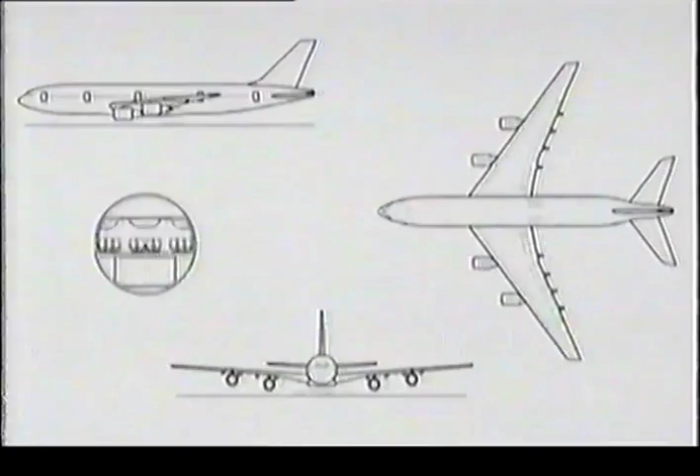Starting from scratch is the most expensive option, but it's what Airbus decided to do. The plane went through dozens of iterations as designers and engineers worked for over 10 years. The size was driven by the airlines, struggling to increase passenger numbers in the face of increasing air traffic congestion.

The airlines told us, don't be shy, don't hesitate. Of course it has to be big. It has to be bigger than anything that is flying. So don't be shy, don't hesitate. Make it really big.

The resulting design was a plane with 49% more space than a 747, capable of carrying over 850 passengers. Using advanced technology, it would be highly efficient and, crucially like the Jumbo, have no competitors.

If they could get it right, the A380 could fulfill its ultimate goal, to make huge amounts of money. Is this about money? Of course it is. Think about the revenue potential. Each airplane sells in today's dollars at a catalog price of about $300 million.

Over 20 years, our global market forecast is about 1,600 aircraft. Assuming we got that entire market, we won't, but assuming we did, with a monopoly position, you'll get pretty close to it. That would be, over the next 20 years, 480 billion US dollars. Suppose you only get half of it, 240 billion US dollars at catalog price. Now that is an awful lot of money.

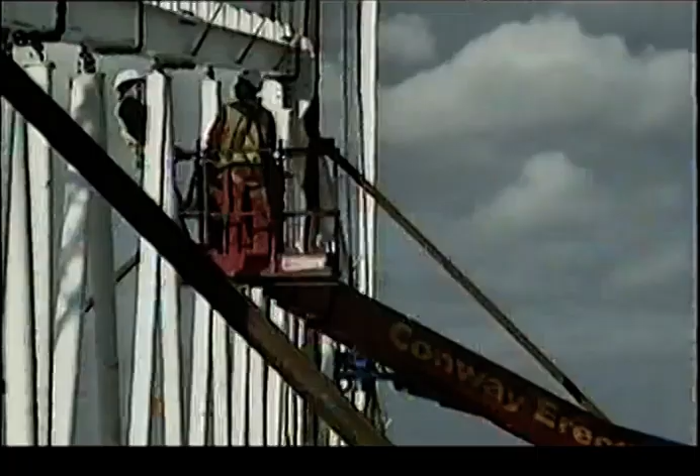December of the year 2000, and now that Airbus have a basic design for their huge new plane, they can start building it, or rather the buildings that will build it. The aircraft is so big that new factories are needed for almost every major component. On top of that, Airbus always share the work between its 4 founding countries, so a major international construction project is required.

The A380 will be built from a giant kit of parts made mainly in Spain, France, the UK and Germany. And each country has had to invest heavily in new facilities. Other parts will come from more than a dozen other countries, so the plane is truly a global effort.

It's big, it's really big. You name it and people are working on it, so at the end of the day it's almost impossible to count the number of people working on this project.

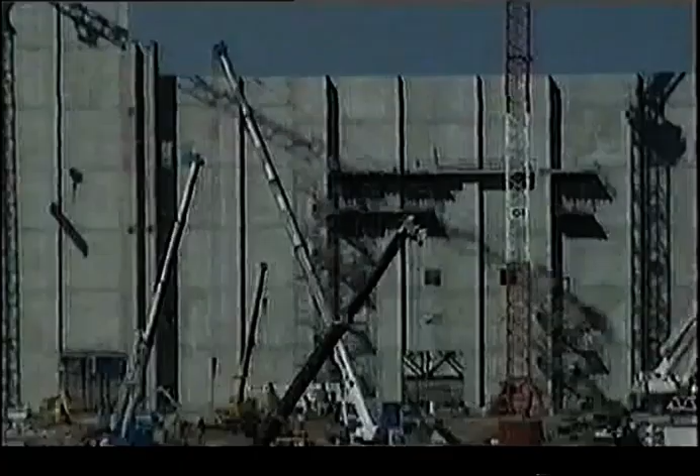The biggest single development is near Airbus headquarters in Toulouse. The final assembly line is where the various components of the plane will be joined together.

Work began in 2001 on a complex that would cost £240 million on its own. A third of a mile long, it covers 24 acres, big enough to hold 8 planes at once. The huge cost of this programme means Airbus have to sell 250 planes just to break even.

And to help the drive for early sales is a nearby showroom. Inside is a full-size demonstrator of the new machine. Getting customers to spend a lot of money on a plane that has yet to fly is quite a challenge.

But Chief Commercial Officer John Leahy is full of confidence. Why would you want to spend $265 million for something like this? Because it'll do something no other airplane in the world can do, and that's bring people 8,000 nautical miles in a level of comfort that's never been provided before.

Although this interior is just a fantasy, an exercise in design possibilities, it is still a salesman's dream. How often do you see this? Well, yes, it's an extra large loo, but it's also a shower. And this is something that you don't see in an airplane, and maybe you should.

The mock-up is designed to whet the appetite of customers such as Sir Richard Branson, head of Virgin Atlantic. He's agreed to buy 6 planes, based on the promise that the A380 will set new standards for performance and efficiency.

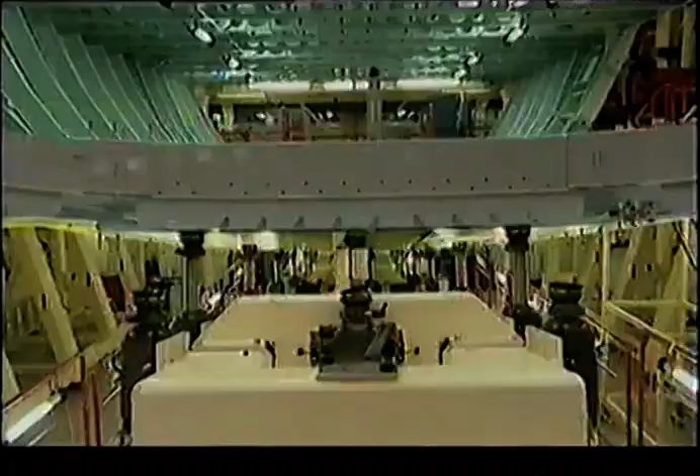The first piece of metal is cut in January 2002. And shortly afterwards, huge components are being produced in the brand new factories all over Europe. In Germany, large sections of the fuselage rapidly take shape, put together using high-tech materials and thousands of rivets. In France, the carbon fibre centre wing box, the structural heart of the aircraft, comes together.

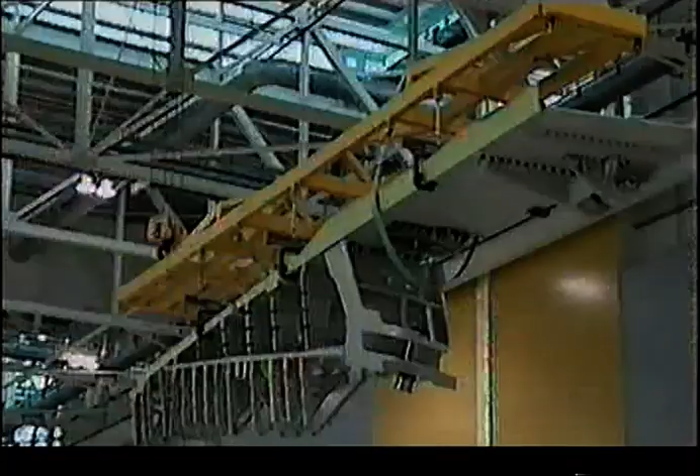In the UK, in Broughton, North Wales, the wings themselves are assembled. Built up from hundreds of components, each one is constructed standing on its rear edge. It looks more like the hull of a ship than part of a plane.

By November 2003, the first wing is ready to be hoisted out of its supporting jig, and engineer Simon Shingler and his team will get their first sight of the giant part.

The whole idea of having you all here is to make sure that you're all concentrating on your one specific station, right? That's how we're going to ensure we take this wing out without anyone hurting themselves or without the components getting damaged. When we're lifting this wing out, make sure all the mobile phones are turned off.

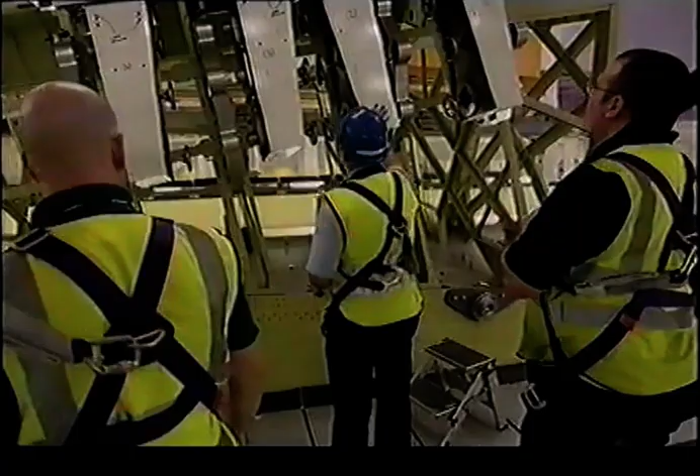Despite the laughter, this is a serious business. The wing weighs over 30 tons, and to damage it now would be disastrous. Everybody gets very excited, and it's easy to leave one of the attachments in place or part of the tooling, because there are so many attachments around the periphery of the wing. If that happens, it causes damage when it's being lifted.

Alan Ferguson is in charge of the first stage, attaching the hoist to the solid titanium lifting points. What we're doing is making sure we get the crane correctly aligned with the lifting attachment, so when we make the initial lift, we don't get any sway on the wing. So it's critical, yeah.

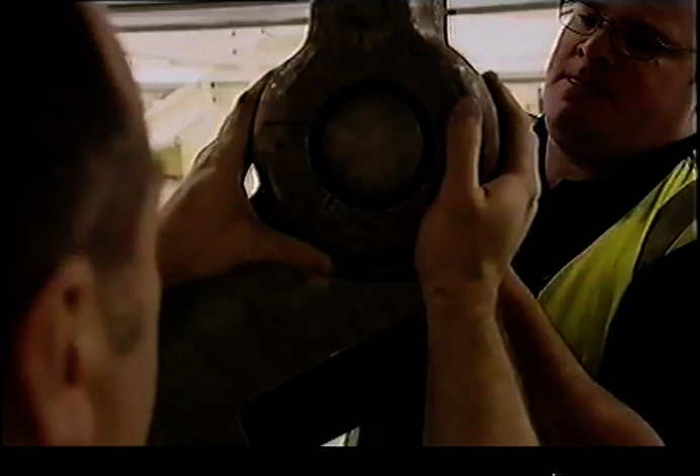Right, we're ready to go. We want everyone in place now, and then we're going for it completely. Right, gather round please, gents. The operations team and the crane driver are going to take some weight. We're going to release the front spar, and then we're going to remove the wing. Try to stay calm, don't panic. We'll do everything nice and slowly, there's no rush now, but once we start, we're not stopping. Thanks very much. Okay. Right.

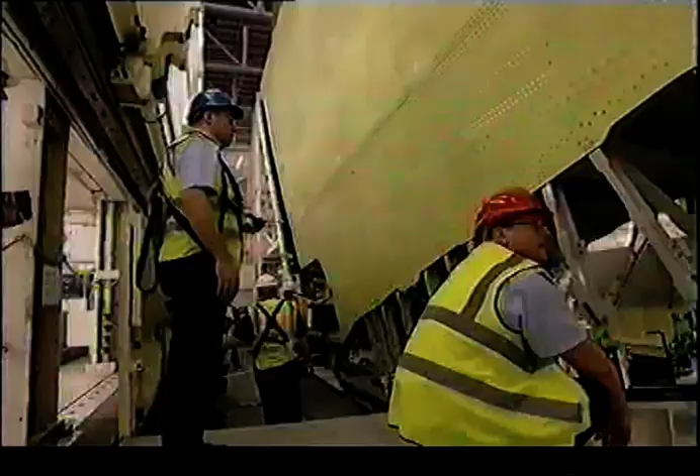Steady now. Okay. All right, you're clear, take it off. Right, get that spar support out, please. Is it down? With one small movement, the wing is free. Clear, I think the wingtip's clear.

Now it can be lifted out and into the next hall. Don't forget the outboard end. Okay now.

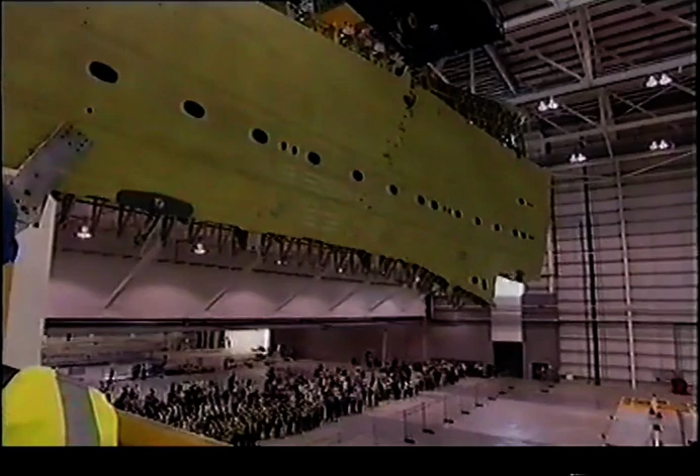The wing may look big now, but once the rest of the parts are fitted, it will grow by half as much again.

The true size of the A380 is starting to show. I think the whole world's going to look on in awe the day it flies, and I think the Boeing Aircraft Company have got something to be very wary of.

But even while the major components are being built, detailed design of the interior and many other parts is far from finished. Charles Champion and his team of senior executives meet once a fortnight in Toulouse to try and keep the project on course.

With so much happening at once, there is a real danger of becoming overloaded. Can we start? It's a question of time management, because not only time management at work, but also time management with your personal life, and you can burn out. Basically, if you're not careful, you just can burn out, and at the end of the day, you're out.

Andreas Fähring has been brought in to replace the previous head of interior engineering. For him, it's particularly tough, because he's taking over a department that is already 3 months behind schedule and over budget. Team and myself, we are under enormous pressure, because we have to keep the timeline, and we are late. We have to keep the budget line, and we have major difficulties to do so.

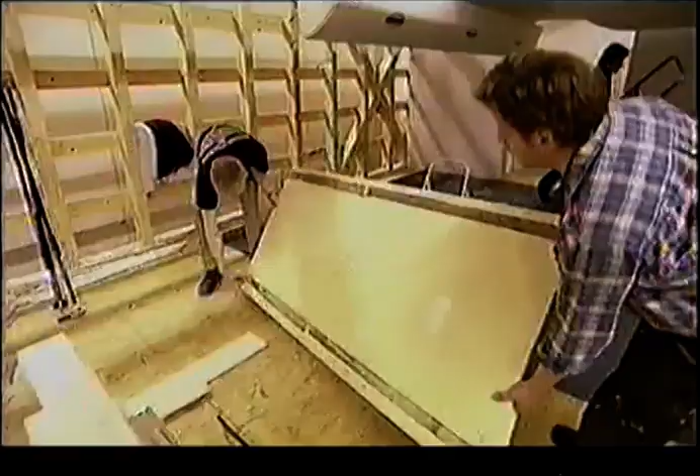Each airline wants a customized interior, so Andreas has to engineer dozens of unique features to keep them all happy. You can change the lighting area over here. You can have green light, you can have blue light.

Then there's the task of turning the sales department's dreams in the mock-up in Toulouse of showers and the like into reality. We will have showers on our aircraft, but not in the way they're displayed at the moment in Toulouse, because those are designers, not engineers building the stuff.

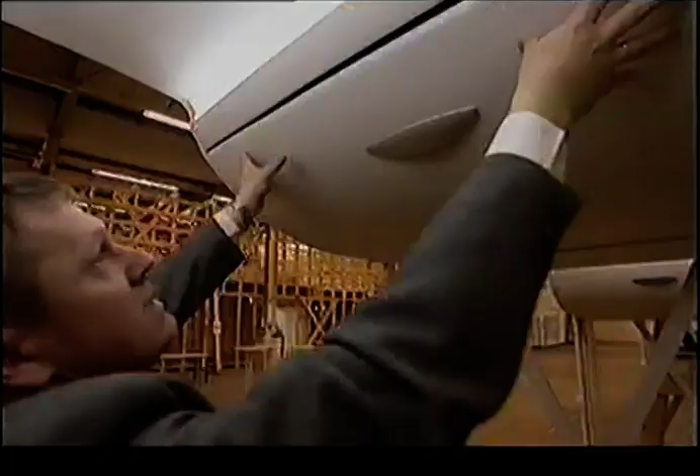Even engineering something as simple as the overhead lockers is a challenge. They're manually operated, and the loading limitation of these bins is 50 or 60 kilos. So you can imagine if you have a stewardess or a passenger trying to move 50 kilos like this, they're not that strong, and it is a difficulty.

Although the cabin doesn't need to be finished for the first flight, building and testing it is a process that will take several years. Even now, if the early customers are to get their planes on time, the team have their work cut out. What is really needed is time. Time.

By March 2004, the first set of wings are nearing completion in Broughton. The fuselage parts are almost ready to leave northern France and Germany for the final assembly line in Toulouse, where everything will be joined together.

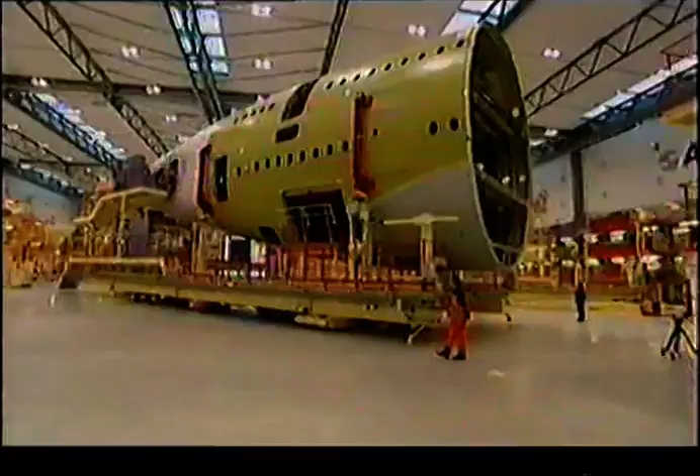Carrying such large objects thousands of miles is a major task in itself, requiring one of the most complicated and expensive transportation systems ever devised. The parts will travel by road, river and sea, in a logistical dance that has to fit together perfectly and work first time.

The fuselage, wings and tailplanes will be carried by ship from the factories in Germany, Britain, France and Spain, converging on the port of Pauillac near Bordeaux on the west coast of France. From there they'll be loaded onto barges that will carry them 59 miles up the river Garonne.

But still the journey isn't over. A fleet of lorries will haul the parts by road the last 152 miles to the brand new factory in Toulouse.

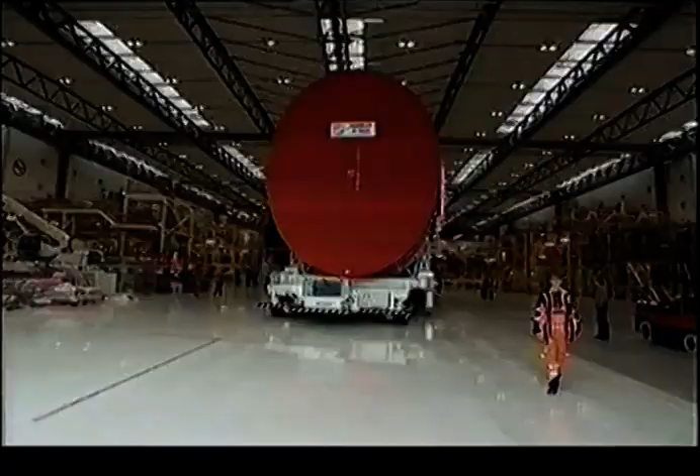It's a highly complex scheme that's never been attempted before, and it starts in Hamburg on the 24th of March 2004, as the first finished fuselage sections of the giant airliner emerge into the light of day.

The parts are carried on purpose-built radio-controlled, self-powered low loaders. Each one has 96 wheels and can travel at a maximum speed of 6 miles per hour. The factory is just a few hundred yards from the purpose-built dock where the cargo ship waits.

Now begins a 970-mile voyage through some of the busiest shipping lanes in the world to the west coast of France. Thankfully, the weather is perfect.

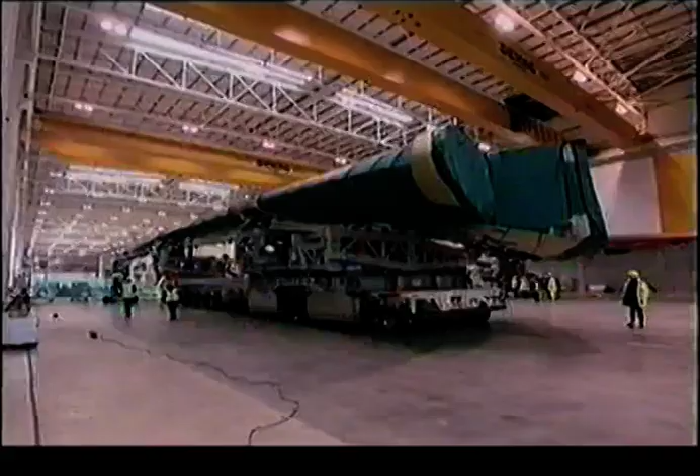In Britain, a few days later, the wings begin their journey. For the UK team, it's a significant day. After the last two months of preparation, and the previous two years of planning, we've actually got the moment now when the wing's going. So it's an exciting time, and it's what people here have looked forward to for many, many months.

Stage 1 of this 1,000-mile trip is to use another low loader to carry the wing a mile from the factory to the nearby River Dee, where a barge is waiting. On the way is a narrow bridge, and there'll be just inches to spare. Very close.

With the first obstacle behind them, the wing is ready to be loaded onto the barge. Now the dangerous tides on this treacherous stretch of river are the next hurdle to overcome. It's not to be messed with, this river. The tide's important because downstream there are three low bridges, and beyond them lie constantly shifting sandbanks.

Sail when the tide is too high, and the barge will hit the bridge. Wait for it to fall, and they could easily run aground. There's a real balancing act as to where you get off the blocks and get under the bridge.

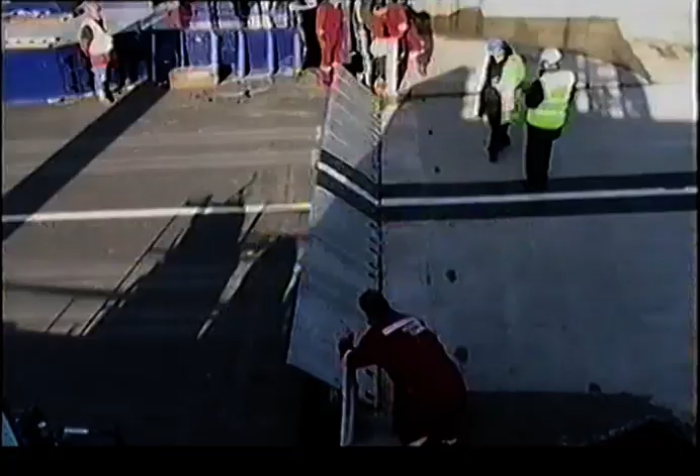The wing is gently manoeuvred onto the barge and the low loader carefully retracted. It's time to put all the theory into practice.

The crew are constantly monitoring the clearance under the bridge, but as they approach, they realise the strong wind is holding the tide back.

They might hit the bridge too soon, so Graham holds off for a few more seconds. Yeah, there it is. That'll do.

Just hope it's not taller than they say it is. Duck now. Hey, I tell you what, that is nice, that is beautiful. Isn't that beautiful? Exactly 50 centimetres. Exactly.

Graham has judged it perfectly. Cutting it fine under the bridges has given him plenty of water under his keel for the remaining 13 miles of river. Soon he'll rendezvous with the ship that will take the Wings to France.

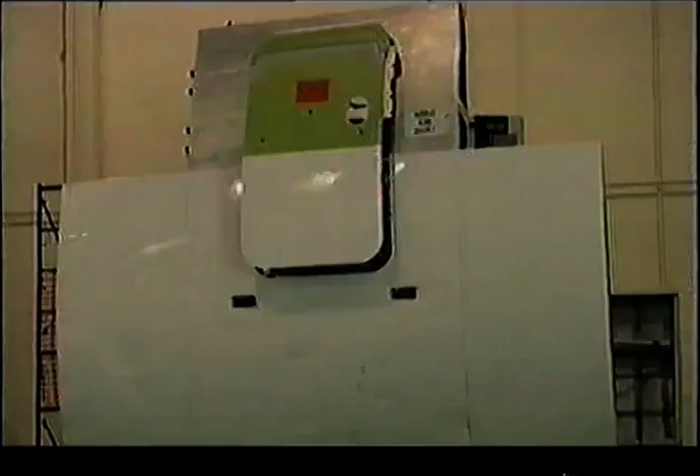Each slide is designed on computer, and this is one of the most complex on the whole plane, the over-wing slide. Today, it will be tested for real, a critical time for the engineers. This is a brand new slide, fresh out of our prototype department, and it's never been deployed, it's never been slid on, and the pressure is on.

The slide fits in a small pack, which is mounted to a full-size mock-up of the plane. It allows passengers to get from a door here, across the wing to the ground, deploying almost as if by magic from here. 3, 2, 1!

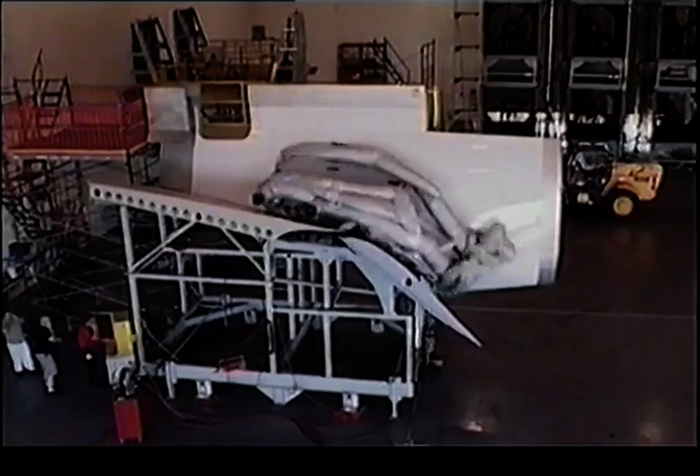The regulations say that 850 passengers must be able to get out of the A380 in just 90 seconds. And the only way to prove the slide is up to the job is to use real human beings.

40 people will take part in the test, and the first step is to get everybody warmed up. Everybody does it! Let's go! Let's do it! Come on!

Ted Oney, who'll be running the test, is wearing a rather special shirt. This is my lucky Hawaiian shirt, of course. Every time I want to run an evac, I wear this shirt. So when people in the plant see me in this shirt, they know we're running an evacuation test.

The aim of the test is to show the slide can hold up to the weight of the evacuees and allow a safe but speedy exit in an emergency. Our slide will have to have 40 people traverse down the slide in less than 17 seconds. That meets a rate, that meets our specified rate. So in the grand scheme of things, we'll be able to say that we could evacuate the entire airplane within 90 seconds.

Sliding can be dangerous, and part of Ted's job is to make sure nobody gets hurt. You're evacuating an aircraft, you need to do it quickly, but I want you to do it safely because your safety is high on my concern list, okay? Remember, getting out of that aircraft, it's in a hurry. All right, we're gonna start in a minute, so put on your helmets, strap them down, let's rock and roll.

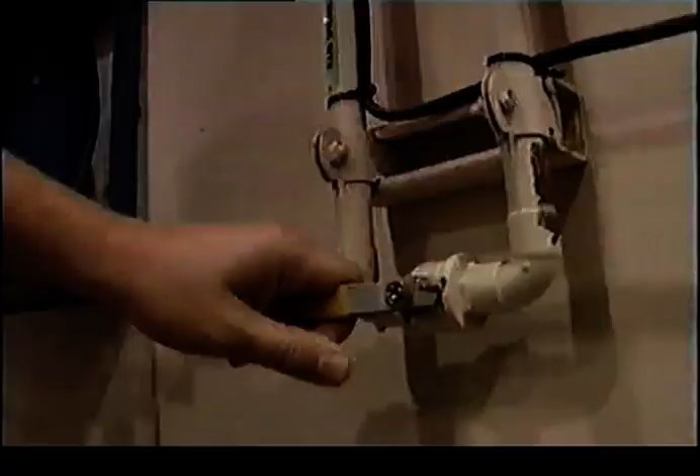To simulate an evacuation in a rainstorm, the slide is sprayed with water. It's risky because now everything is much more slippery.

As the water puddles on the floor at the toe end of the slide here, it means the landing surface is slick. People are used to landing normally, and suddenly it's much more slippery, and if we don't do our job right, we get a pile of bodies at the bottom.

Go, go, go, go, go, go, go, go, go! Get out, get out, get out, get out, get out, get out, go, go, go, go, go, go, go, go, go, go, go, go! Come on, come on, come on, come on!

Yeah! All right! All right, yeah! All right, have a seat! Have a seat. Great job, everybody. Great job. I'm not doing that no more. No way, I quit. Excellent, excellent evacuation it was.

I'm very pleased. Yes, I'm happy with that. There wasn't a lot of bumping. The slide did well. One slide tested, just 15 more to go.

By the 7th of April 2004, thanks to careful planning and good weather, 3 huge pieces of fuselage are nearly at the factory where they'll be joined together. All the components made it safely to Pauillac, up the River Garonne and past the city of Bordeaux.

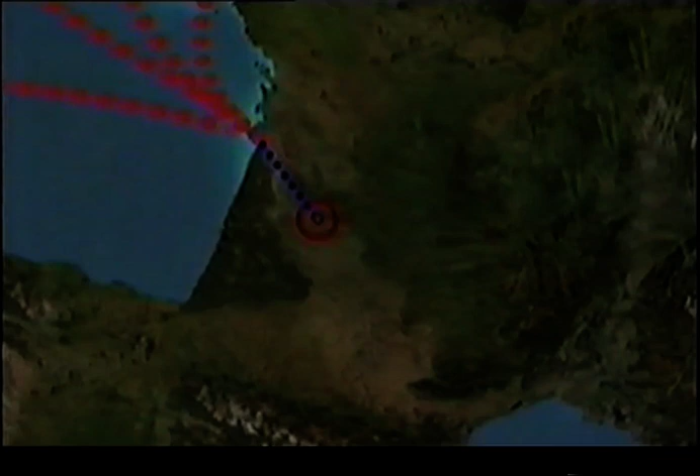Now comes the last leg, 152 miles by road to Toulouse. Loaded onto specially built trailers, the parts have spent the last 2 nights crawling through the French countryside, on roads closed off by the police. Although the end seems in sight, the biggest challenge lies ahead.

2 miles away lies the small village of Levignac. This is the narrowest point on the entire journey. According to calculations, the fuselage will only just squeeze past the houses with centimetres to spare.

The event has attracted massive public interest, and the police are taking crowd control very seriously. Daniel Boutonnet is the man who has to keep this huge show on the road.

I'm confident. I'm not anxious, but for me, I would prefer to be 3 hours in the future.

If the calculations are wrong, the consequences are unthinkable. As they enter Levignac, the police are worried and progress is painfully slow.

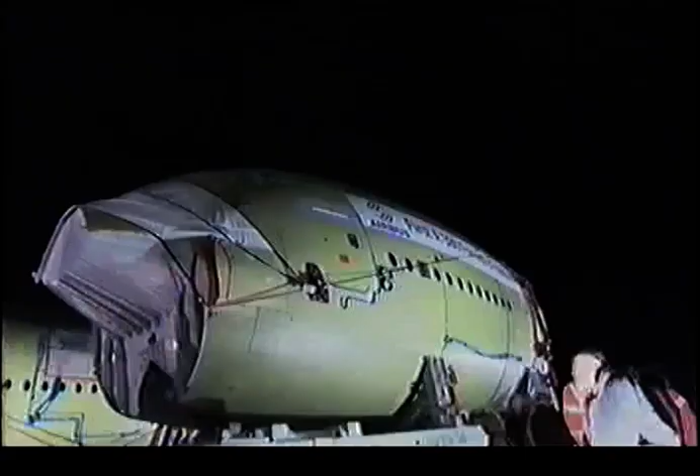The delivery papers are signed, and now Charles and his team are ready to tackle the next phase of this enormous project.

For some people it's like a relief because they've delivered the final assembly line, they've done the factory, they've demonstrated the transport system. But for us guys, we are looking at the next steps: integration, first flight, then flight test phase, and then deliveries to the customers.

The work has only just begun.

By May the 27th, 2004, the process of joining the plane together can begin inside the huge new factory. The plane's aerodynamic efficiency relies on it being accurately assembled, quite a task when dealing with such large parts.

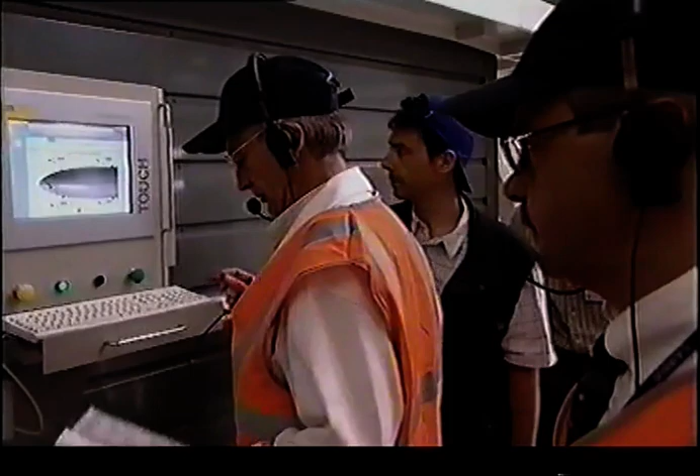Supervising this difficult phase is Gilles Cormier. We need to be very, very accurate. We have to be sure that the shape of the aircraft is in line with the specification, that the geometry of the aircraft is good, and to avoid twisting the fuselage or twisting the wings. And the performance of the aircraft depends on this shape.

Ensuring that the three body sections of this 73-metre giant are brought together in a perfectly straight line requires massive tools, the latest technology, and lots of patience. I feel very confident now, even if it's difficult, because we have put in place very accurate systems.

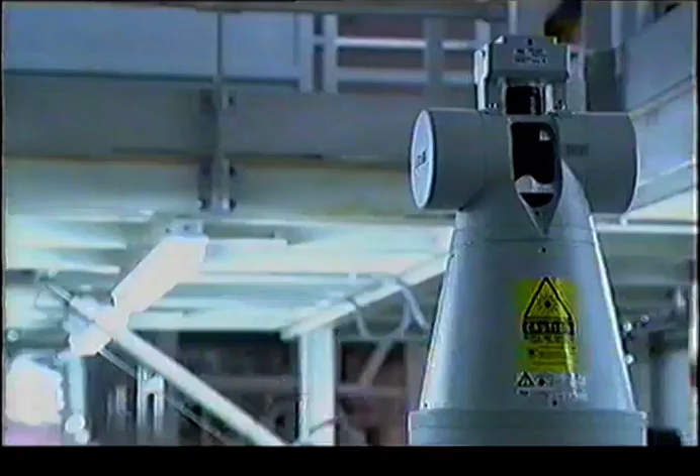The key to success lies in the use of lasers. Invisible beams scan the sections of the fuselage, and the light is reflected by mirrors mounted on the approaching components. From these reflections, a computer can work out the exact relative positions of the parts, ensuring perfect alignment.

Once positioned, the fuselage shells are brought together very, very slowly. Each turn on the dial brings the massive parts a millimetre closer together. On the left, a part made in Germany. On the right, one made in France. The last stage of their 1,200-mile journey.

The clearance is so tight, metal shoehorns are needed to ease one shell over the other. But it's a perfect fit. The final joining together of an elaborate European jigsaw puzzle.

Soon, the sales team will have a real plane to show to their customers. But the question is, will the airlines like it?

It's now the 23rd of July 2004. And for Chief Commercial Officer John Leahy, the pressure is mounting.

Leahy needs 250 firm orders for the project to break even. So far, he has 139.

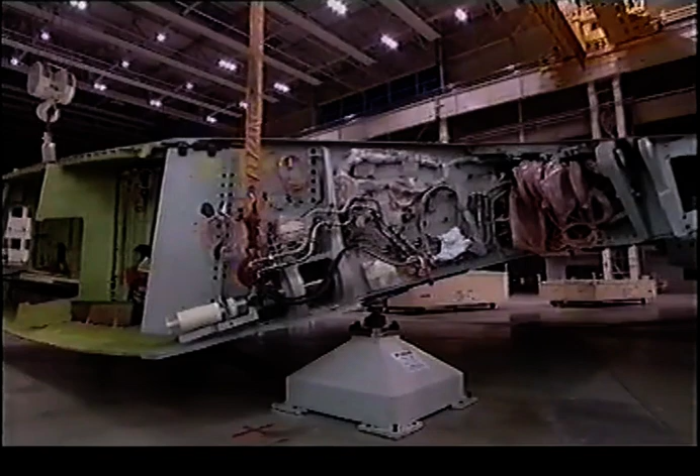It's also an important day at the factory, as the first wing is about to be mounted. Despite the use of computer-aided design, teething troubles are inevitable with the prototype, and some minor work is needed on the fittings for the joint. Project leader Eddie Davis has to respond quickly to this kind of challenge.

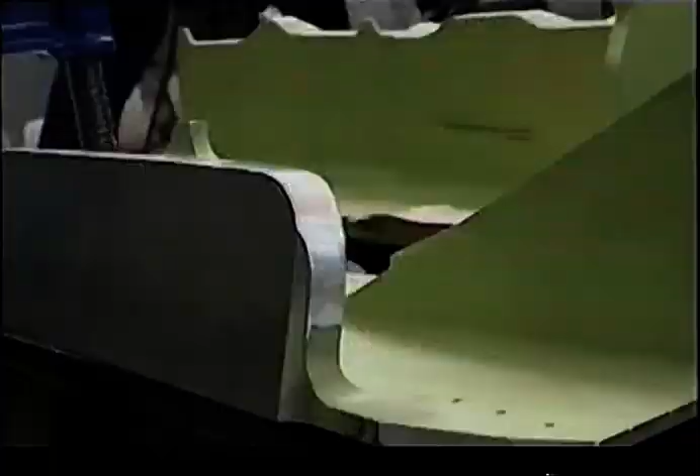It can happen with new aircraft. This is a last-minute job that we've had to come up today. We didn't know that the fittings weren't to the right standard, so now the guys are reworking them. Once again, accuracy is vital. The slightest error in the angle at which the wing meets the fuselage could have a drastic effect on the handling of the plane, and critically, its fuel economy. With so many sales resting on the performance of this machine, it's a job that cannot be rushed.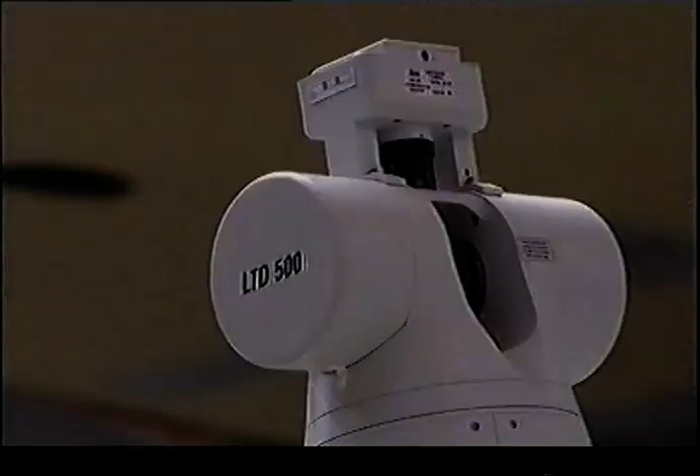Again, the laser positioning system ensures the wing is in the right place and at the right angle. But after a whole day of careful work, another small problem appears. Some large bolts have been left attached to the wing. We must remove this one to finish the junction of the wing. A quick phone call to check that it's okay to remove them, and now the wing can be safely joined to the fuselage.

A couple of miles away, at the perfectly manicured Airbus headquarters, John Leahy is conducting his guided tour for Qantas. They have arrived at the Airbus showroom, where they'll see a new, far more realistic interior.

Okay, now I think we've got just about everybody. Okay, now Rod. Though it's all smiles, this is deadly serious. If they don't like it, there'll be trouble ahead.

It's almost like a young family introducing their new baby to the relatives. You want everybody to be impressed, you want everybody to say it's beautiful, and deep down inside, you're really waiting to see what they truly do say. The head of the airline is Geoff Dixon, a tough-talking, no-nonsense businessman. To begin with, he doesn't seem too impressed.

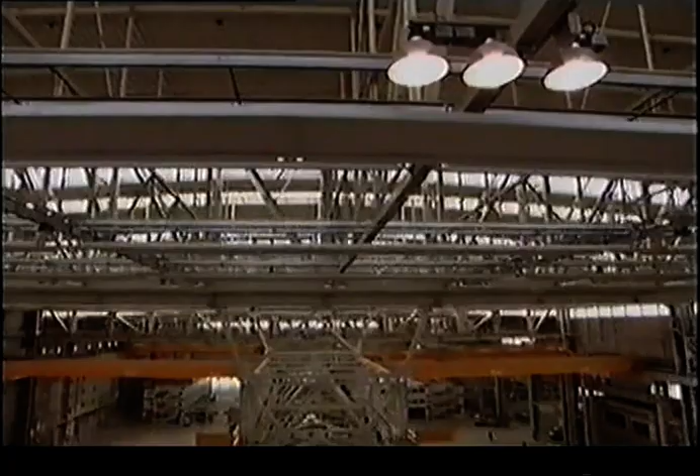If the planes are late, Qantas could demand significant compensation. There's not a moment to waste.

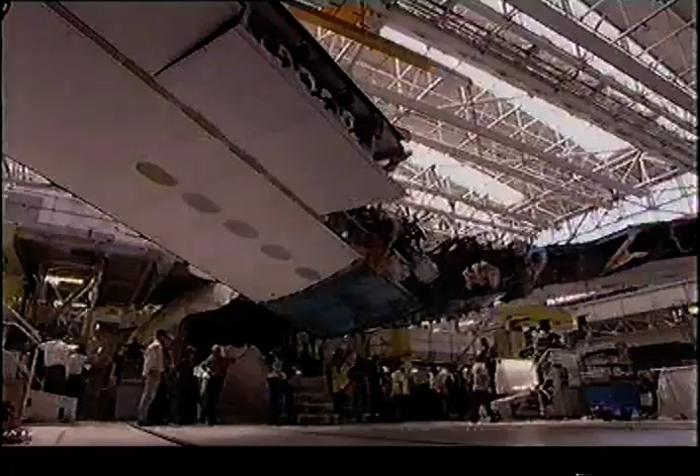By mid-June 2004, major structural assembly of the biggest airliner in history is well underway. This is the horizontal tailplane, with a span of 32 metres, as big as the wings of a small airliner.

Made of carbon fibre in south and central Spain, it's easily the biggest tailplane ever made. The tail fin is another carbon fibre monster, 14 metres high, made near Hamburg in Germany. When installed, it will stand as high as an 8-storey building. Some airports will have to buy new cranes to service it.

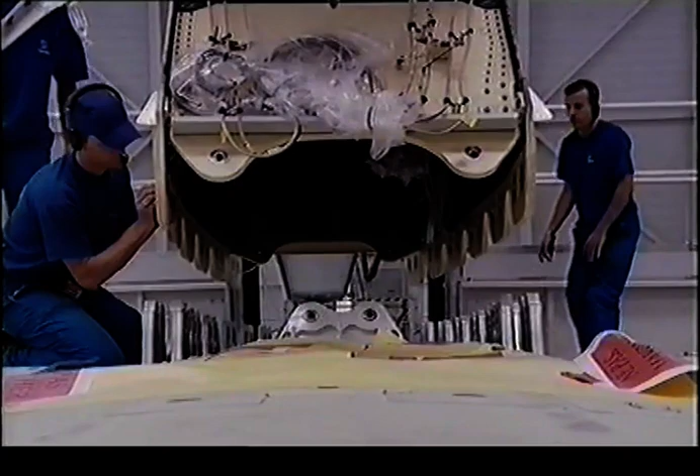Carefully, it's craned into place and attached with 24 titanium bolts. As the last piece is attached, Charles Champion comes to check on the plane, and Gilles Cormier has bad news for the boss.

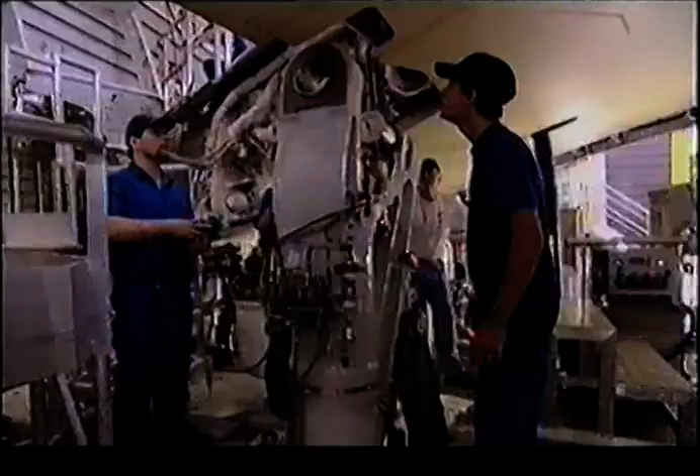The next stage is to install the landing gear. These substantial parts have to be extremely strong. Not only is the A380 the heaviest passenger plane ever built, its landing gear must be able to cope with extreme situations.

Many landing gear engineers have a copy of this low-resolution video clip as a reminder of the conditions that can occur. Heading for the now disused Kai Tak Airport in Hong Kong is a Boeing 747. Approaching in a crosswind, the left-hand gear is about to take the full weight of the plane as it hits the tarmac.

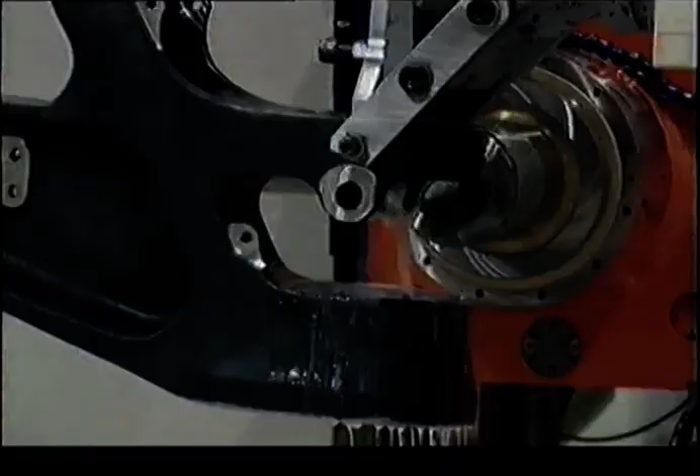Amazingly, this was a successful landing, and the A380 will need gear that's stronger still. The 747's gear is made by Goodrich, who are also supplying the main gear for the A380. Here, near Toronto in Canada, production is well underway and testing is just about to begin.

When we have a new landing gear program, we have a lot of tests that we need to do: strength, performance, dynamics, durability. This one is a performance test. It's one of the first tests we do, and one of the more important tests. It's called a drop test.

What it is, is a simulation of landing. So when an A380 lands, you've got 560 tons of aircraft moving slowly towards the ground, as well as 200 miles an hour down the runway. When the aircraft hits the ground, something has got to absorb that energy.

So if you jump off a chair and land, your knees have to bend and give a little bit. Even just with the weight of a person, you're going to damage yourself if nothing gives. That giving of your legs is absorbing energy - that's what the landing gear has to do, but instead of 180 pounds, it's got to do it for 560 tons.

Suspended inside this huge tower, the landing gear is raised in preparation for the drop. The rig is static, so to simulate the approaching ground speed, smaller wheels driven by powerful electric motors spin the big 55-inch tyres in the reverse direction.

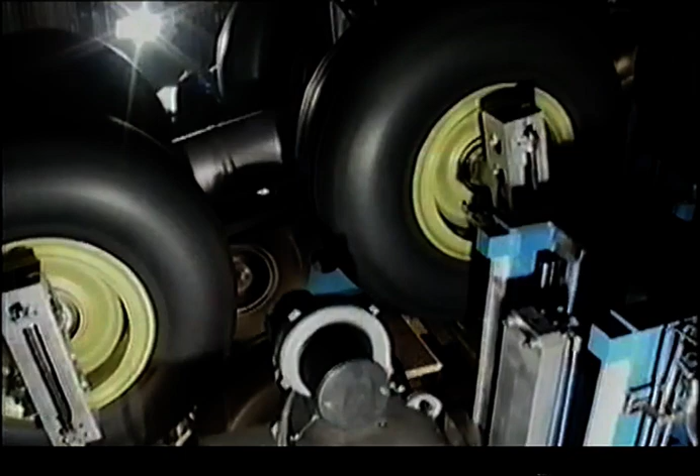When a switch is flicked in the control room, a hook at the top of the tower will release, allowing the gear to fall. It must absorb the same energy as a 100-mile-an-hour car crash without being damaged. It's a critical phase in the whole program.

This could be a make or break test. If the performance of the landing gear isn't what we predicted it to be, it could impact the schedule for the first flight. So it's essential that the gear performs to how we predicted it, and from these tests, we'll be able to tell whether it does.

Although it's huge, the size of the A380 means that this 6.5-ton component is just one part of the plane's undercarriage. In total, there will be 2 6-wheel units under the body, plus 2 4-wheel units under the wings, and a 2-wheeled set in the nose. So what you're about to see is only a fraction of the energy involved when the vast airliner touches down.

Okay, I'm going to drop now. Go ahead.

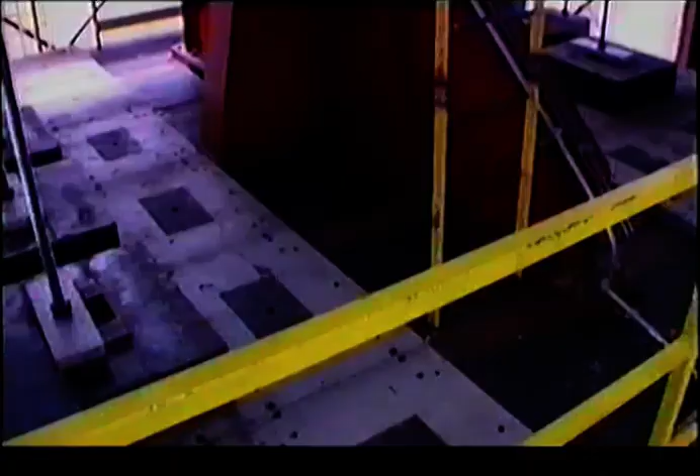Just the delay, you can see it moving here. All right, the test goes well. Early data shows that although there was an unwanted shudder as the wheels came to a halt, the landing gear shrugged off the huge impact with ease.

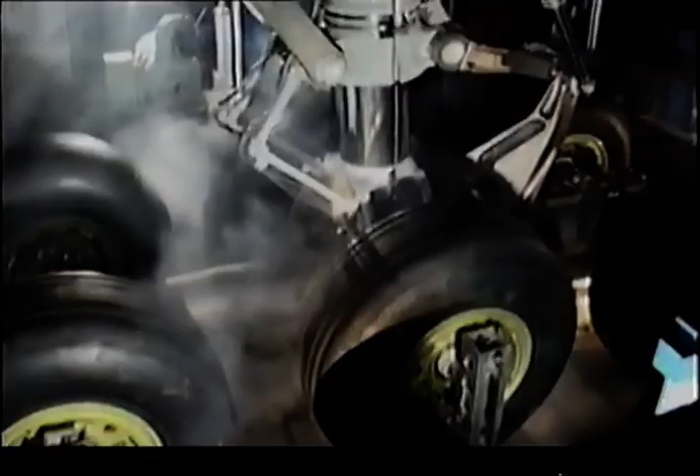It's now only 9 months to the first test flight. In Toulouse, the tail cone has finally been fixed, and the A380 is at last ready to move to the next stage of assembly. For Gilles Cormier, it's a relief.

Maybe we forget a little the trouble we encountered during the past weeks, and now we are looking at the aircraft itself, the achievement, more than the difficulties we had. Now's the chance to see at last the biggest airliner ever built.

With the shell of this aircraft complete, things are about to get really complicated. The plane is scheduled to spend the next few months in this vast hall, where thousands of parts will be fitted, including over 500 miles of wiring. The man in charge of this tricky phase is fully aware there's an awful lot of work to be done by the end of October.

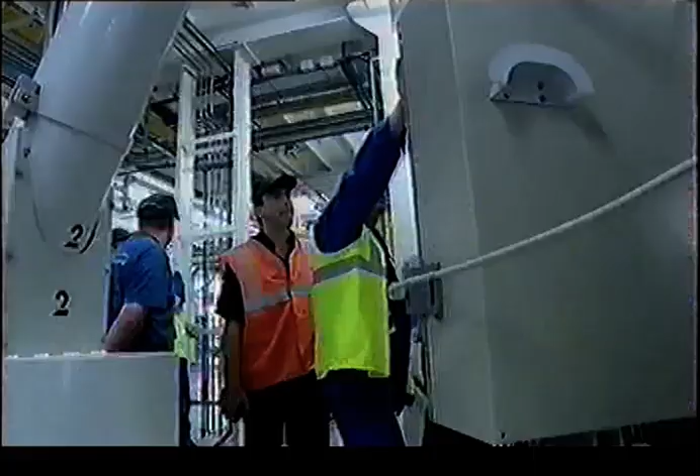The plane is lifted on huge jacks, and teams of technicians begin work. The next milestone is when the aircraft will be revealed to the world, just 196 days from now. Attending will be VIPs, 5,000 guests, and the world's media, with the pictures beamed by satellite all over the world.

But for now, one 55-year-old man has a rather special interest in the new machine. Jacques Rosay will be the first person in the world to fly the plane. Seeing it for the first time, his reaction is not exactly what you'd expect.

Generally speaking, it's an aircraft larger than the one we have already, but I think I feel very, very confident.

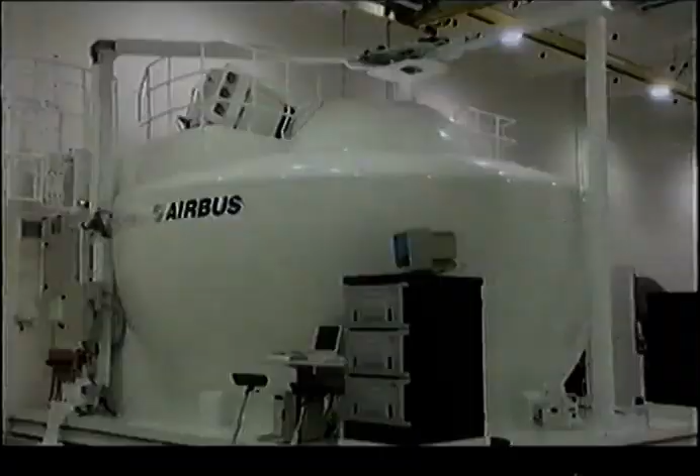He's confident because although the plane is still far from finished, he and his team have already spent thousands of hours flying it. These flight simulators hold the heart and soul of the new plane, already living and already being tested.

The state-of-the-art computerized flight control system means that the plane can be made to handle almost any way the development team chooses.

You don't realize that you fly such a big aircraft. You fly it like you fly a little aircraft. It's incredible. It's very, very easy to fly, like a bicycle. It's a kind of large bicycle, if you like.

The simulator is so advanced that today they are testing a scenario that is only likely to occur once in over 1,000 years of flying.

3, 2, 1, now. The wings are covered in ice, 2 of the engines have failed, and half of the flight computers have gone offline. Can the plane still be controlled?

Piece of cake. The technology that makes the plane so safe is also extremely complex.

And when battling against a deadline, complexity eats valuable time. The schedule is slipping.

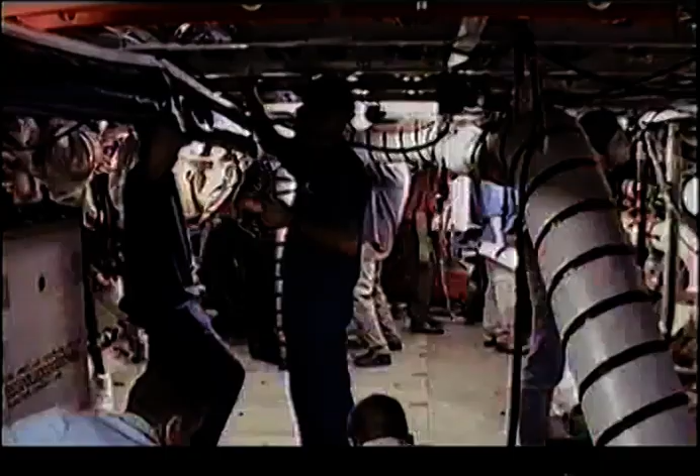Getting the airplane out on time is critically important. There are significant penalties that we would have to pay to each customer if we delay his aircraft after a certain grace period, I don't want to say how long, but a certain grace period involved in every contract.

We can't relax. We have no right, we have no time to relax. So every hour, every minute we are there on the workshop, our main job is to receive pressure and to transmit pressure. And it's a nightmare.

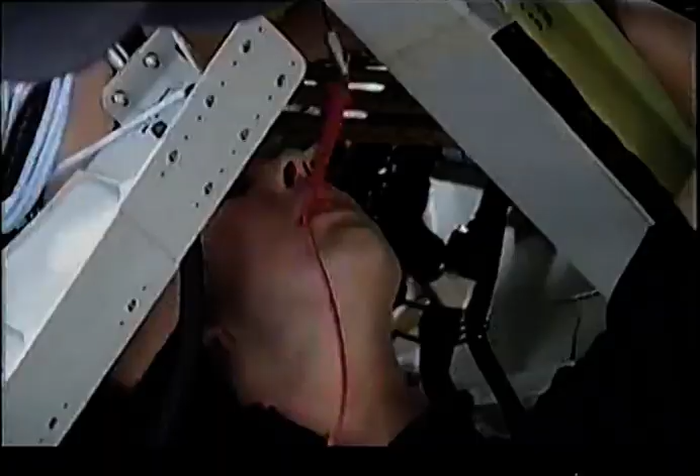The penalties for late delivery run to hundreds of thousands of pounds a week. And that pressure runs down the chain of command, all the way to the men and women building the machine.

Some people could, how do you say, break down, no? Christian Polite is the engineer in charge of the tail fin, known as the vertical tailplane or the VTP.

Building this huge part has not gone smoothly, but finally it's time to install the last piece, a camera that gives the pilot a bird's eye view from the very top of the fin, some 23 meters up.

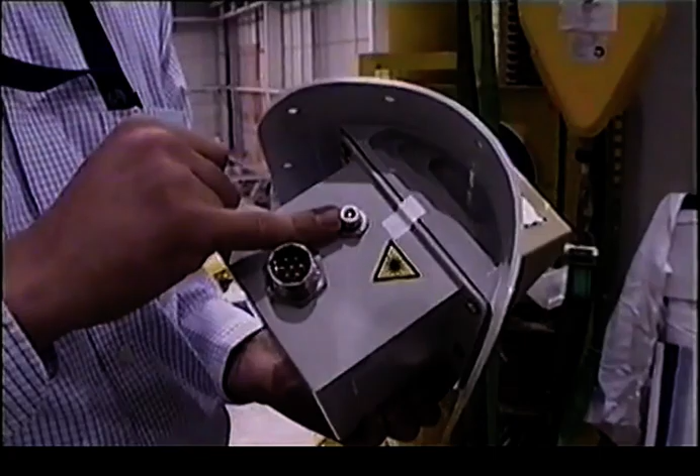Right now we're going up almost to the very top of the vertical tailplane in order to install the last component which remains on the VTP. You can easily see that this part is only screwed to the structure by, I guess, 20 screws around, and it has to be connected to the electric system via these two little connectors. The signals are transferred via a fiber optical cable down to a monitor in the cockpit.

Here at the Airbus factory in Stade, Germany, back in February 2004, Christian oversaw the final construction of the largest carbon fibre fin ever conceived. The ambitious scale of the production process meant there were always going to be problems.

We started with a schedule which allowed us to assemble the first fin within a reasonable time, but in fact we encountered problems which delayed the assembly, and to worsen the situation, the lead time was shortened. So we ended up with a lead time that was nearly half of the original we planned. The fin was delivered on time, but it wasn't completely finished.

Christian has had to move to France to continue the work. We came here and thought we have a good planning, a good time schedule, we have everything on hand, but it wasn't like that. The moment we started working, we had to change each and every point. The planning was upside down, so we just had to start to work. That's the way you find the way through the jungle.

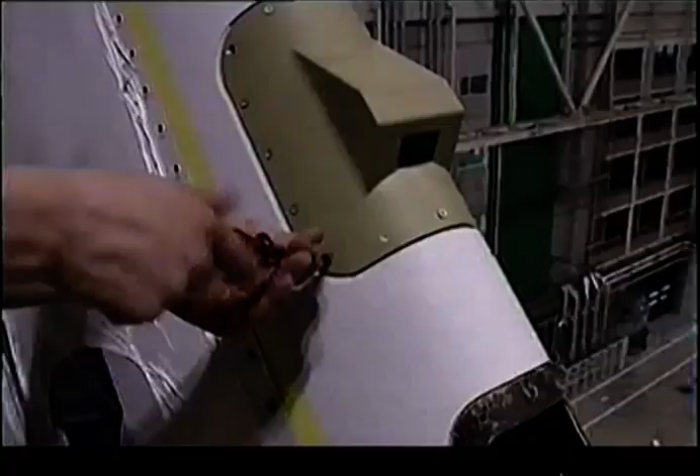Now, though, as the screws go in on the camera, the end is in sight. It's a good sound - that means the screw is in. With every screw, we're a little step towards the end.

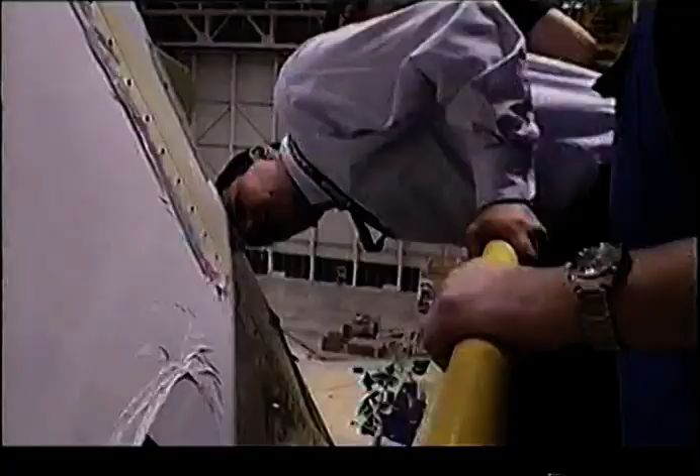The connector is here, and the cable ends here. We need about another 1 centimeter, about half an inch, which is how short the cable is.

These moments really piss me off. When you're almost done, so close, you can see the end - you almost stepped over the line, and then someone blocks you, hits you in the face, saying, 'Hey, you're not done yet. How could you imagine?'

Despite the setbacks, the build must continue as fast as possible. Now they can begin mounting the engines, some of the most expensive parts of the whole aircraft. Together, 4 of these giant Rolls-Royce Trent 900s cost nearly £36 million, a quarter of the cost of the plane.

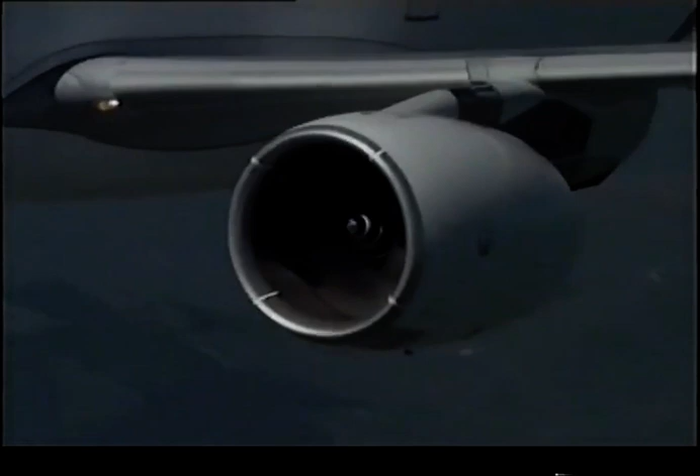Back in May 2004, the engine flew for the first time, bolted onto a much smaller airliner, dwarfing its other engines. Weighing over 6 tons, the Trent 900 can produce up to 35 tons of thrust at full power, burning a gallon of fuel every 4 seconds. These early tests proved the engine at altitude, but there's a much tougher test to come.

Here in Hucknall, Nottinghamshire, a second test engine will soon be a smoking ruin, deliberately destroyed as part of a dramatic yet vital safety test.

It's an important time for the entire project, and as engineer Hilary Barton travels to the test, she admits to some nerves. 'I must admit, I've got a few butterflies at the moment, but basically everybody's done the preparation and it's just now a matter of getting on and doing the test. Obviously before the engine starts, you're sitting there just kind of hoping it all goes well, but just really waiting for it to happen now.'

Every few years, a fan blade will break in a jet engine somewhere in the world, a rare but violent event that must not put lives in danger. At the root of the coloured blade is an explosive charge. With the engine at full power, it will be detonated, releasing the blade with tremendous force. Whatever happens, no large debris can be allowed to burst out of the engine casing - if it did, it could do serious damage to the rest of the aircraft.

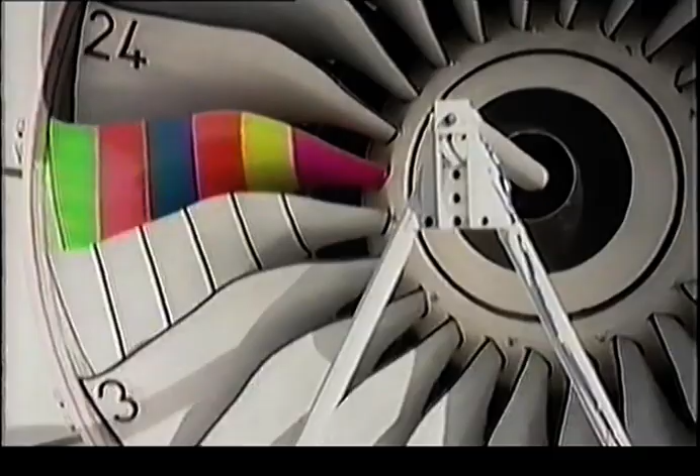From the safety of a room 200 metres away, watching on video, 25 key personnel are waiting. In the split second the blade is released, the casing must successfully contain an enormous impact.

It is a very violent test. This thing is spinning around at full power, so the forces on the blade are quite significant - it's like having a locomotive hanging on that blade. So you're actually having to contain the energy of that system. There's a lot of energy involved in the design and containment of the blade.

The engine is run for 5 minutes so final checks can be made. With such an expensive test, nothing can be allowed to go wrong. High-speed film cameras are used to analyse the action, and at last the throttles are opened and the engine is brought to its full, awesome power.

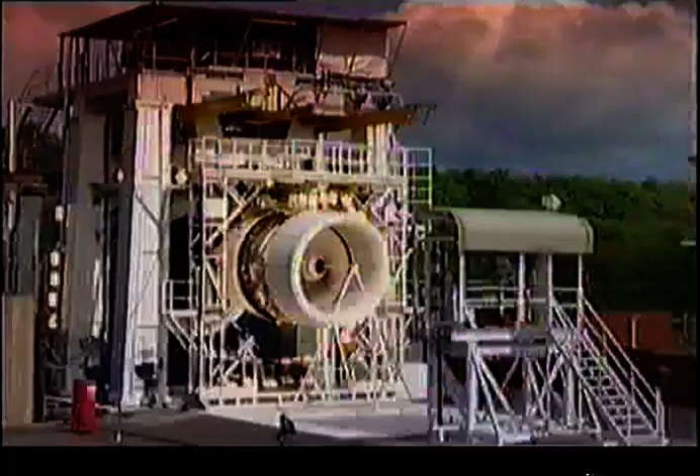This is what it feels like to be inside a building 200 metres away from a £9 million blade-off event.

Blade-off testing is normally top secret, but for the first time, Rolls-Royce have released this footage. Although the engine was totally destroyed, the fan case did its job, and no large lumps of metal were ejected.

That was an expensive 5 minutes. It was, wasn't it? I feel very relieved. Obviously, it's gone well. We've had a good test, and it's all credit to the guys. Yes, we've got a successful test under our belt. So I feel relieved and really pleased.

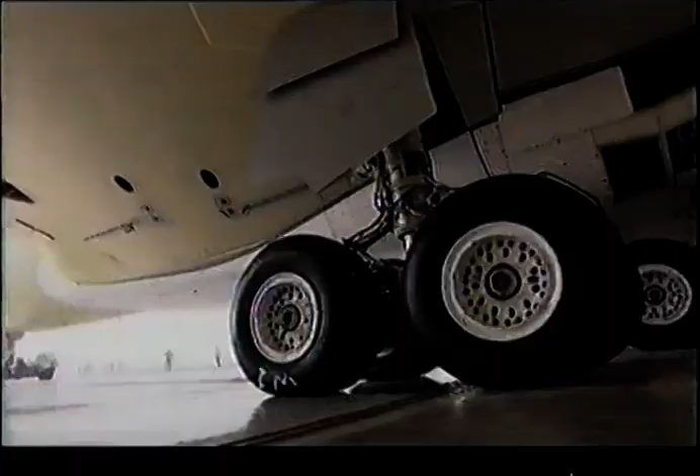By December, the plane is finally about to leave the equipping hall in France. Airbus are trying everything to make back time, even if it means working over Christmas.

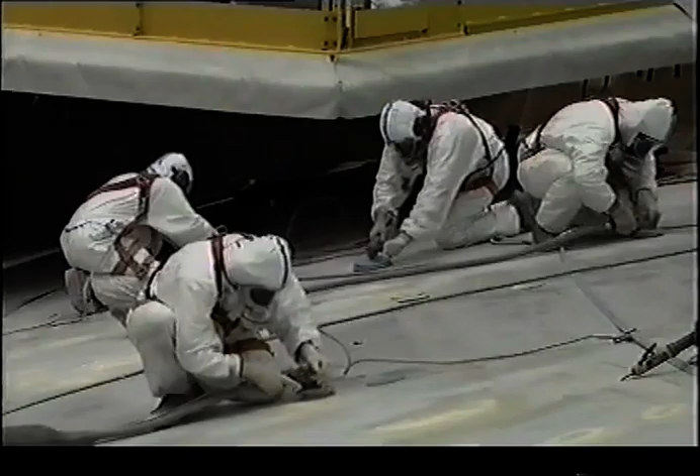With the grand unveiling just 5 weeks away, the next giant task is to paint the massive machine. In yet another vast hangar, working over the holidays, 90 painters descend on the plane. First, they rub down over 10,000 square metres of bodywork. Then, after applying a very large amount of brown paper, the A380 is ready for a brand new paint job.

All in all, more than half a tonne of paint and primer are needed to protect the aluminium skin from the elements.

The final livery has been a closely guarded secret until January the 18th, when the A380 goes public for the first time. The world's press are here, and as ever with this plane, it's a big deal.

Inside part of the final assembly line, seating for 5,000 guests has been installed. In the equipping hall, now full of part-built planes, TV reporters are hard at work, feeding the story to the networks. Richard Branson has grabbed the headlines with news of double beds and casinos in his planes.

For John Leahy and many others, it's a welcome moment of satisfaction. It took an awful long time to get here, didn't it? But now we're here. It's pretty exciting.

The heads of state and governments arrive and take their places for a spectacle featuring dry ice, flying machines and computer graphics. Despite several high-profile speakers, there's only one star of this show. Finally, the biggest airliner of all time is there for all to see.

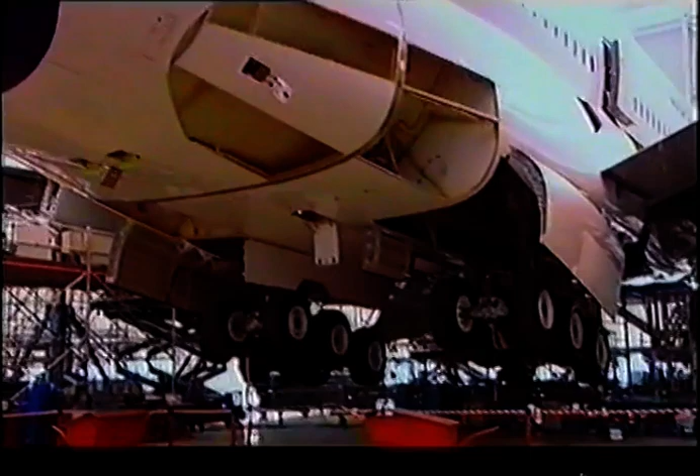By March 2005, the Airbus A380 is being worked on at a feverish pace. The engineers simply have to get the plane finished and into the air. It's like the final climb to the peak of Everest, let's say. The last 10, 20 feet when the oxygen levels are so small is often the most difficult part of the journey, and that's essentially where we are at the moment in terms of this aircraft.

Simon Sanders is in charge of testing the deployment of the landing gear, a critical safety requirement. In just 56 days' time, the pilots' lives will depend on these 22 wheels, retracting and extending come what may.

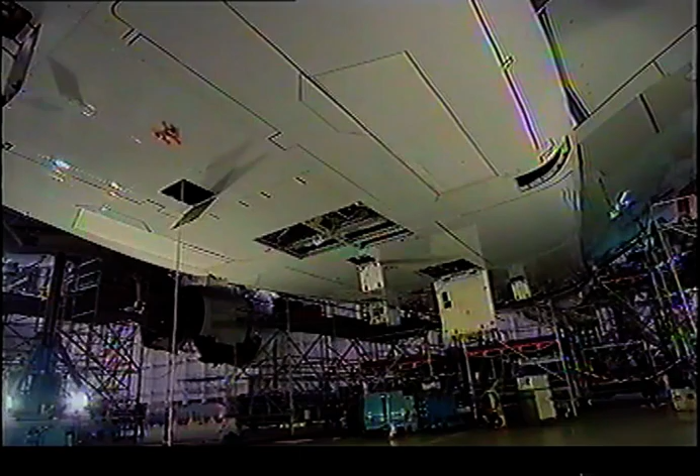Their last hurdle is to simulate a worst-case scenario. Even if all power was lost during flight, the pilots must still be able to lower the wheels to land. In such an emergency, the gear should fall down under its own weight. But testing it is risky because the wheels will hit the doors as they drop, and that could cause damage. So this is the big test, yeah.

The outer doors begin to open under their own weight. Any second now, the locks that hold the gear up will release.

Immediately, it's clear that something has gone wrong. Next, the massive six-wheeled main gears deploy. And after a delay of 16 seconds, the jammed outer wheels slip free. It's not a good result.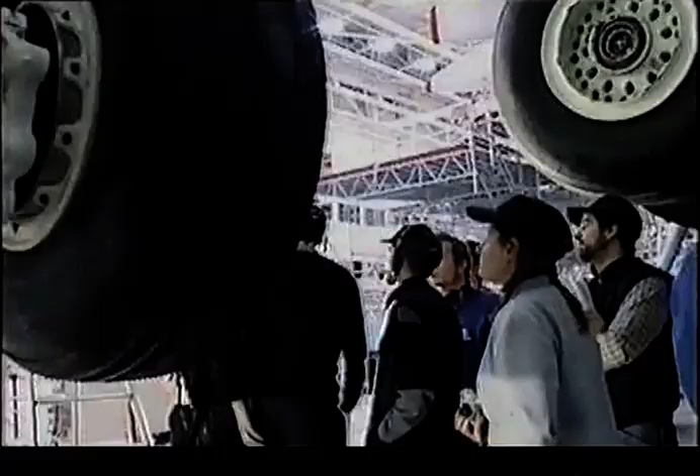We've worked as hard as we've done the best we possibly can, and we are where we are at the moment. For me, it's something to get stuck into, something to understand, something to find a solution.

The team suspect that the wheel might be sticking on a guide ramp, an aluminium plate where the wheel is supposed to push the door aside. Smearing it with grease should prove if this is quite literally the sticking point.

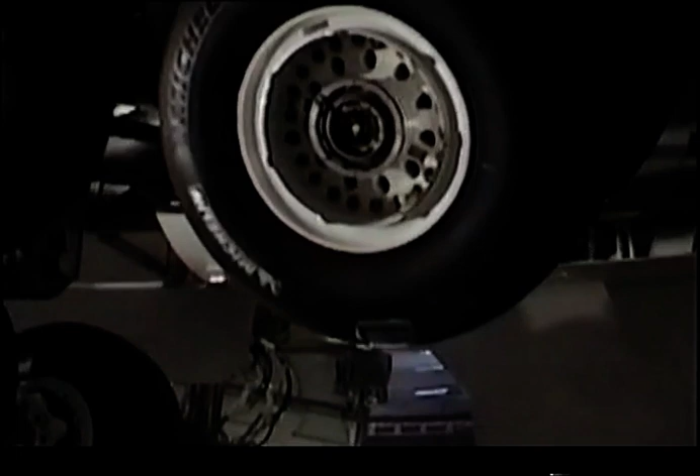The ramp does seem to be the problem. A permanent solution is needed, and fast. Finding answers to sticky problems is all part of the business. And over in Hamburg, Airbus have been straining to ensure another important system works perfectly.

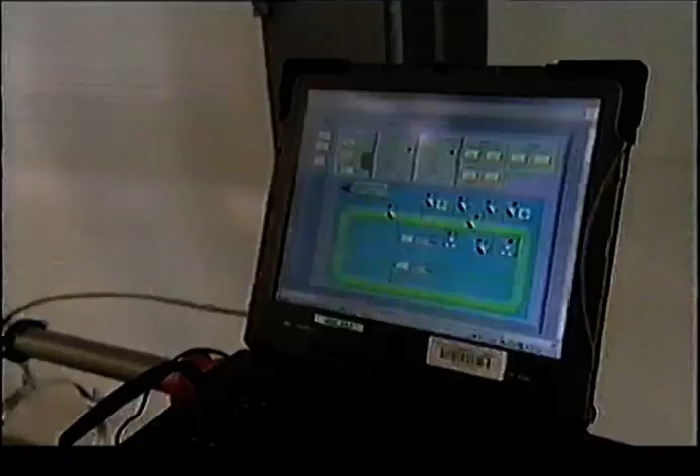Laid out in this building is a full-size test rig of the waste system for the A380. With up to 20 toilets and around 900 metres of piping, it's a big job. Senel Myrtle and Dennis Kaiser have been hard at work for the last 2 years. We will give you a short demonstration of a toilet flush on the A380. So first we have to evacuate the toilet system. I can start this, it will get a little bit loud.

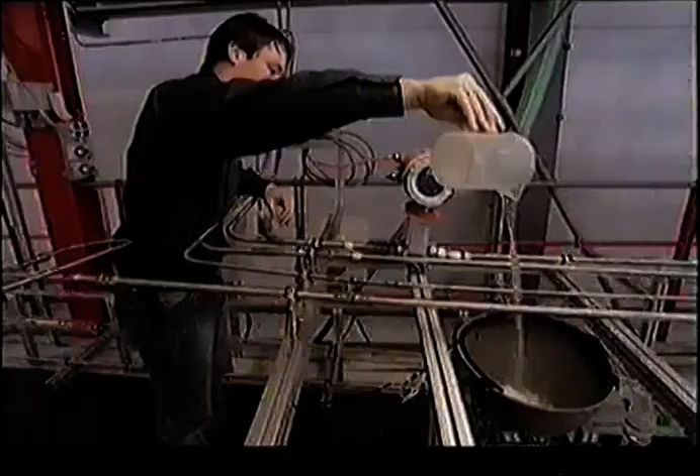The toilets work by pumping air out of waste tanks in the rear of the plane, causing a partial vacuum. When a toilet is flushed, air is sucked in to fill the vacuum, and the waste is drawn down the pipes into the tanks. In the finished aircraft, these parts are made of titanium to save weight, but here Perspex is used for clarity.

This is Formula One technology for toilets. And the result is some seriously speedy sewage. The speed on the piping is around 60 meters per second. 60 meters a second is about 130 miles an hour.

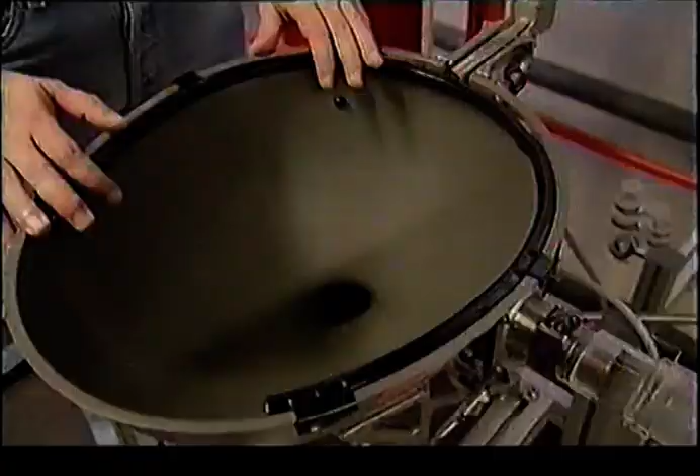Such high-performance plumbing is needed because of the size of the plane. At nearly 73 meters long, the loos at the front are a very long way from the tanks at the rear. This is the most forward toilet in the A380, the one the pilots would normally use. It is quite difficult because you have a pressure loss from the waste tanks to this toilet because of the length.

It's a challenge not to be sniffed at, but undeterred the guys give it a go. Just seconds later, the waste arrives at the tank, and flushed with success, the engineers bring the A380 another step closer to reality.

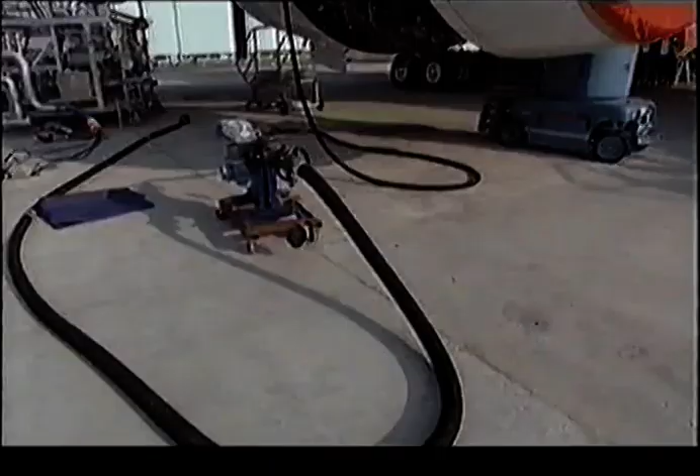By March the 14th, 2005, the A380 is parked outside the factory here in France. The customers for this first plane are technically the test pilots who will fly it. But there's still a lot of work to be done before they will accept the machine.

Head of the programme, Charles Champion, comes to take another look and discovers it's not all bad news. That's the most important part - the coffee machine for the flight test crew. If this doesn't work, they will never take the aircraft.

Joking aside, it's clear that the plane is far from ready. The landing gear is just one of the things that need to be finished. We still have a lot to do. There is a lot of activity, so some of it is related to troubleshooting, and other related to closing the area, but we do have a lot of people still working on the aircraft.

The next day, the test pilots turn up for a photo shoot. The media are naturally interested in the 6 men who will fly the A380 for the first time. Although they pose happily for the cameras, it's clear where their real interest lies, for within minutes of the last shot being taken, they're in the plane checking out the new machine.

For Flight Test Director Fernando Alonso, it's important to feel comfortable at his post. This is the place where I will be sitting for the first flight, and it'll be almost my home for the next months ahead.

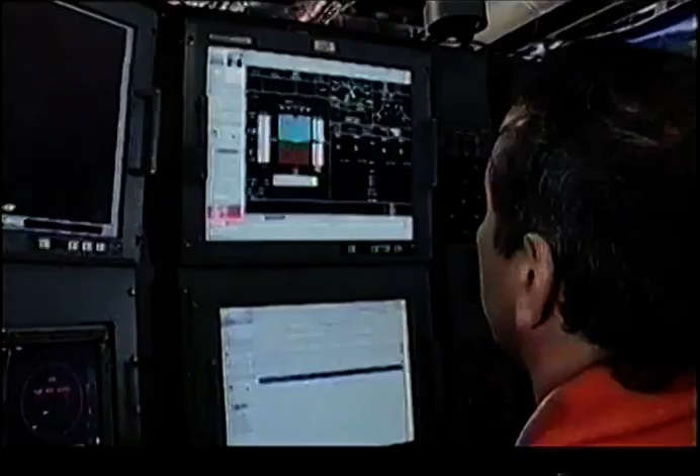Surrounded by screens and readouts, Fernando will be able to monitor everything happening to the plane in real time. This screen, for example, is what we call the flight display. It shows us the aircraft pitch attitude and bank angle, the speed, the angle of attack, the altitude, and the heading. Just by having a glance at that screen, we have a very good overall picture of the airplane.

The aircraft is equipped with sophisticated flight instrumentation, thousands of sensors that record every aspect of the plane's performance. Gathering this precious data is vital to the test flight program. If on the day of the first flight, the flight instrumentation does not work, we will not fly. So, I think that sums it up.

Despite the seriousness of the task ahead, there's no doubt the A380 is beginning to generate a real buzz. It's really great to be here. We've been waiting for it so long, and now we're almost there.

March the 30th, and the plane is in a hangar again for final tests on the electrics and hydraulics. The moving surfaces are working, but one safety-critical system still remains unproven.

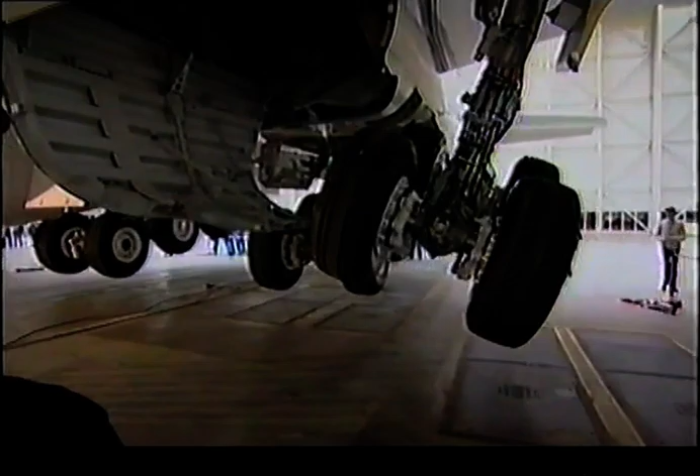As the landing gear is retracted in preparation for the test, everyone is aware they cannot afford to fail. In the cockpit, the system is primed. C'est parti, je lance.

The problem persists, but at least the gear slips free sooner than last time. In flight, the airstream will probably shake the gear free sooner still. It's up to Gerard to decide if he's happy to accept the plane with the gear as it is.

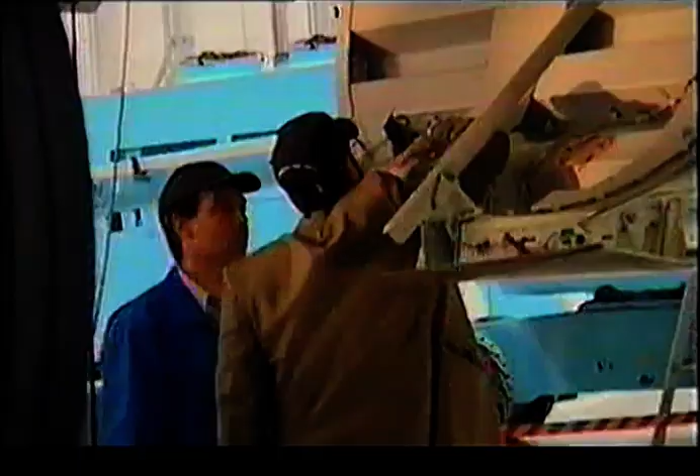It's not marvelous, but it is working, and at least even if the left landing gear is not extended at the same time as the right one, yes, I think I will accept it.

The team will continue to refine the system, but at least the plane can now be handed over to the test pilots.

Fernando Alonso is taking the opportunity to look round the plane to check that nothing has been missed in the final push.

Like always, at the end, there's a big rush. We'll get very excited, but at some point in time you need to take a decision: okay, now stop, it's over, and we take it over, because otherwise it will just go on forever and ever.

The plane has everything needed for the test to come, including these water tanks that will simulate the weight of hundreds of passengers.

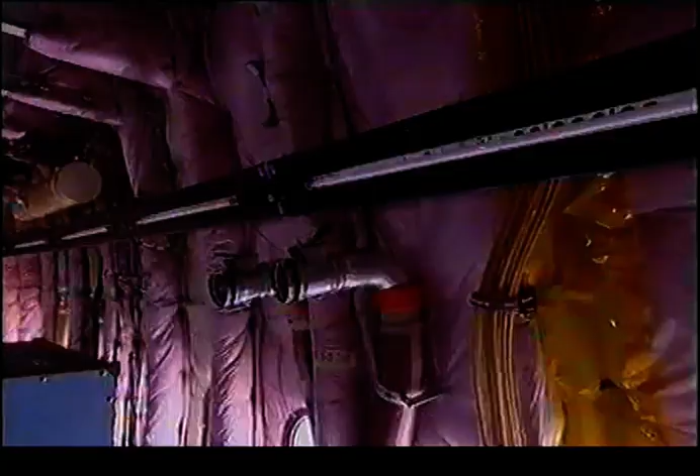But in the rush to get ready, it appears that something's been overlooked. The cabin lights are not working. Cabin illumination is switched off. So we have no possibility to switch the cabin illumination.

I need the lights, the cabin lights need to have power, not to be off. We have been having handover meetings for the past two weeks, and nobody ever said that the cabin lighting was not working. Nobody ever mentioned the limitations. Nothing was said about lighting. So now we put on the breakers. If something burns, it will burn.

With Fernando's words ringing in their ears, the engineers get to work, and in no time the lights are on. Immediately the mood changes, and the plane can be officially handed over.

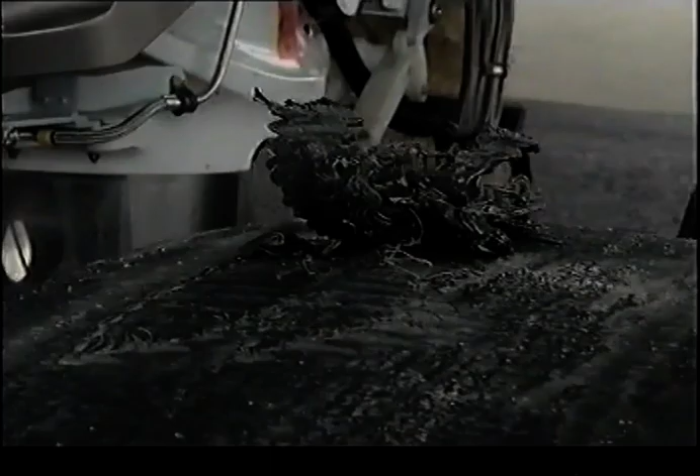Gradually, the speed is increased, and most importantly, the brakes are tested. By the look of the tyres after the tests, the brakes are well up to the job. Confidence in the aircraft is growing every day.

There's still some little things to be fixed, but we're getting closer. Every day we're closer.

Each of the flight test team has a very specific job, and flight test engineer Jacky Joye's role is to monitor the engines.

On the way back from one of the ground runs, Jacky thinks he may have spotted a serious problem. I saw it while we were taxiing back from the inside. I saw that there was a white spot that looked suspicious. He suspects that something has gone into the engine, and there's a fear that whatever caused these white marks...

...has damaged the 6-ton, £9 million power plant. Replacing the engine would almost certainly delay the first flight. Gérard Desbois arrives to give his expert opinion.

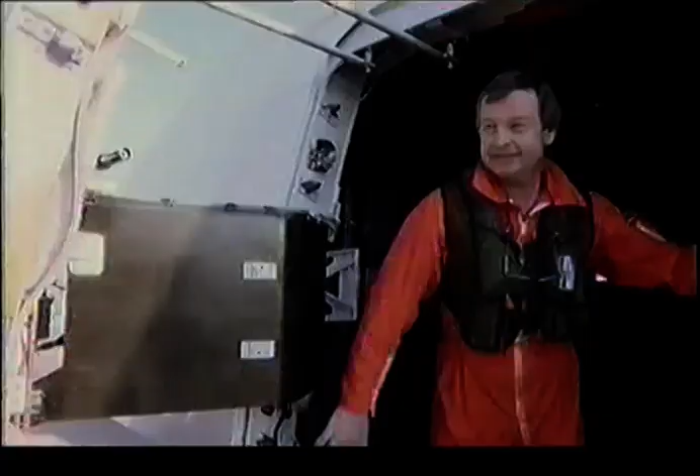The engines are started, and the aircraft is pushed back.

On the far side of the runway, Christian Polite, whose team fitted the tailplane, is just one of thousands who have worked so hard to get to this point.

In the last seconds before takeoff, I don't think I'll think anything about it. Just cross the fingers and get it off the ground, yeah?

At 10:18, the plane is lined up on the runway. While the world waits with bated breath, inside the plane the only problem seems to be the strap on Fernando's helmet.